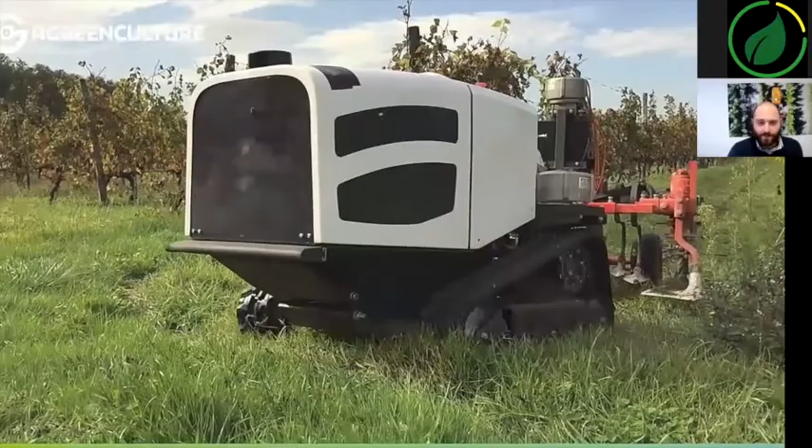My name is Jérôme Asmar, and I am Head of Business Development at Agreenculture. I will be dedicating the next 10 minutes to introduce you to our company, as well as the products we have to offer. I will be more specifically presenting CEOL, the first worldwide autonomous inter-row crawler for vine and perennial crops by Agreenculture.

Our company is a Toulouse-based agricultural robotics startup, founded in 2016 by Christophe Aubé, a farmer's son. Our structure includes today more than 40 collaborators.

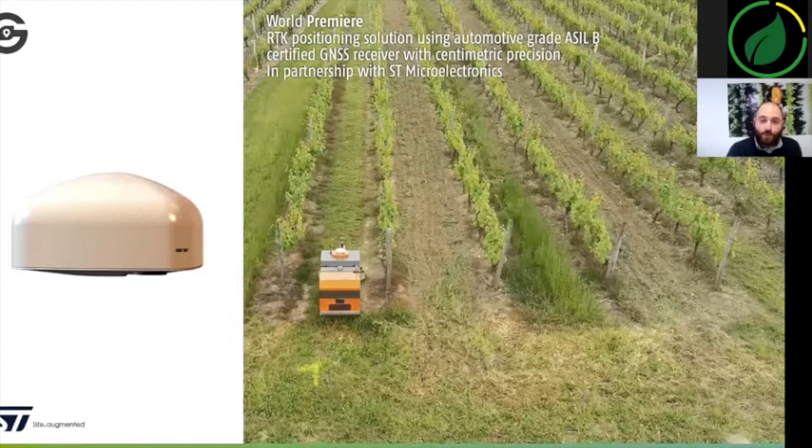Our company has 16 years worth of knowledge in R&D in GNSS RTK integrated positioning. Today, we offer on the market a world first in RTK positioning solutions, certified ASIL B, automotive grade, with centimetric accuracy.

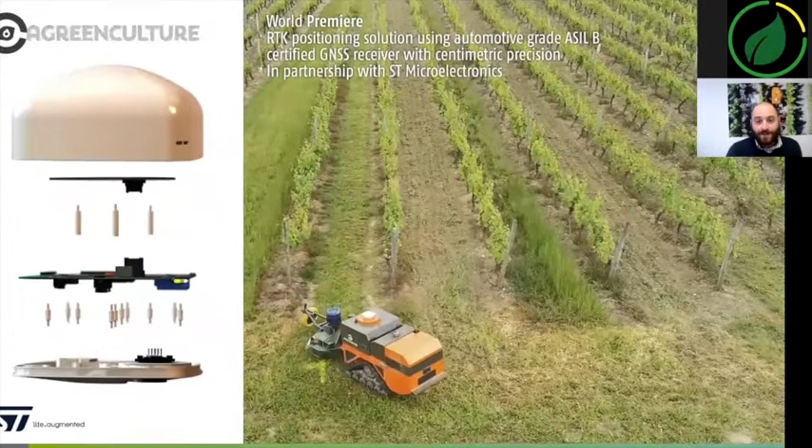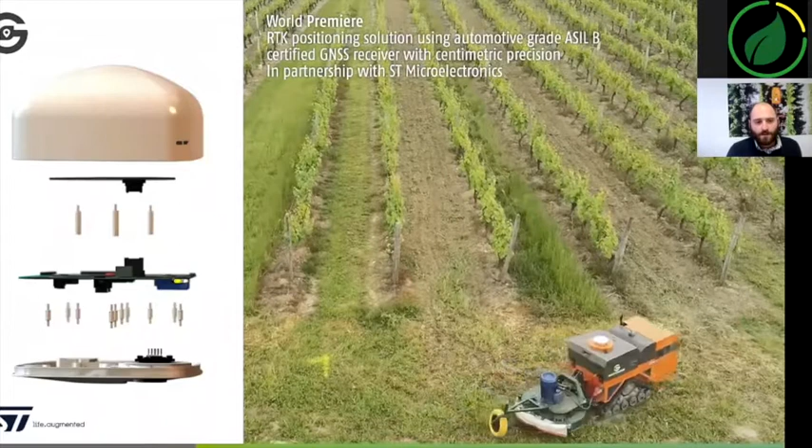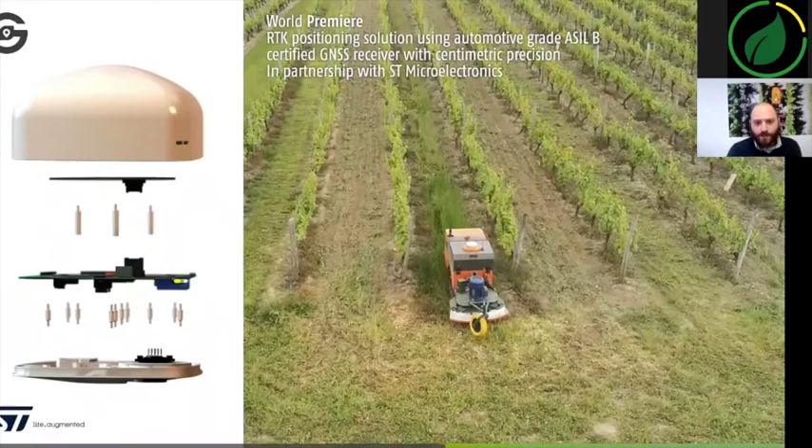In addition to positioning, Agreenculture has mastered the development of guidance laws, enabling a machine to evolve in its environment. Our flagship product, the BM Guide Box, concentrates all our knowledge and expertise. Highly connected, it is used today to position and guide our robots as well as those of our partners.

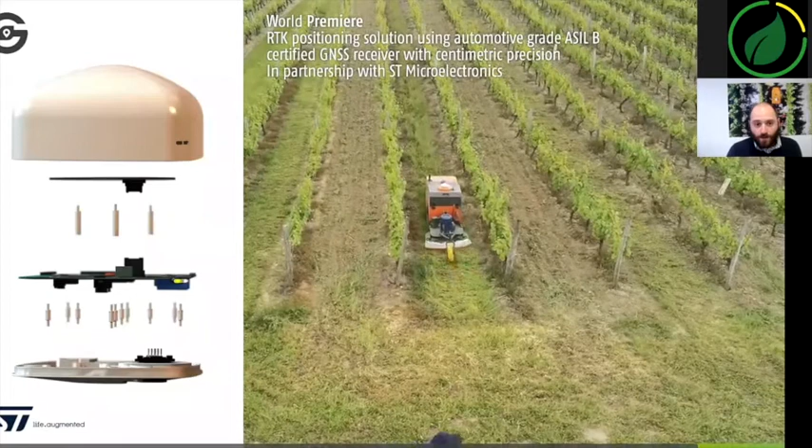Through standard communication protocols such as CAN-open, we are able to interface with any type of machine that we want to automate. Our objective is to guide in a secure and autonomous way the largest number of machines for agricultural and non-agricultural use also.

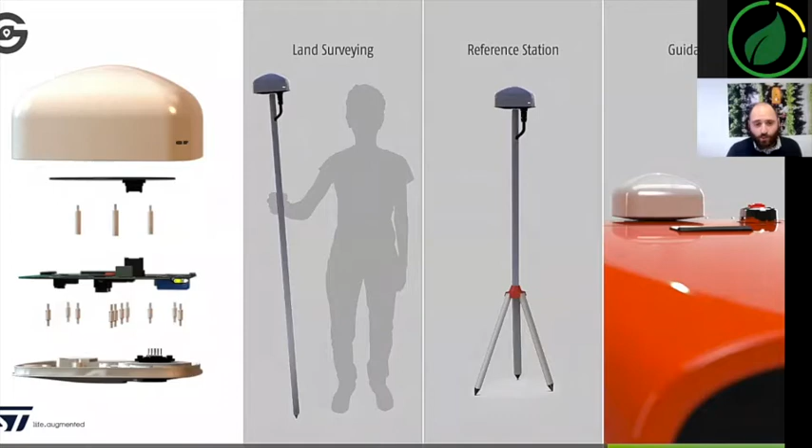It is certainly not by coincidence that Agreenculture has established itself on both the French and worldwide agricultural robotics scene. We have and continue to carry out various projects with major players in agricultural machinery equipment.

In field crops, we carried out in 2018 the CEOL challenge with the company Kuhn, which consisted of using a fleet of 3 robots to carry out an almost complete itinerary on 50 hectares of corn in northern France.

In perennial crops, especially vines, we responded with the company Pellenc to the CIVC Champagnes project call. The purpose is to develop together a robot dedicated for the Champagnes region. We are continuously looking for new partners and new challenges to innovate, making farmers' life easier.

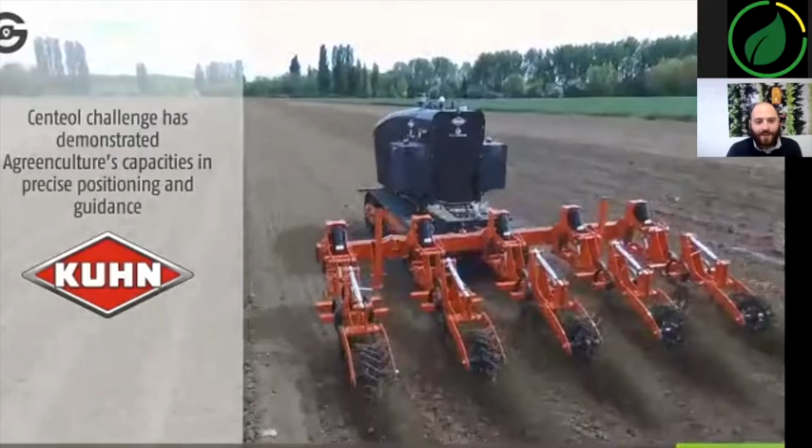Mechanization today represents 30 to 40% of the expenses on a farm. This percentage will increase in the coming years, while reducing the use of chemicals such as glyphosate. The phase-out of this chemical is already quite burdensome at both technical and financial levels. Reviewing our cultivation practices will be a necessity in the coming years.

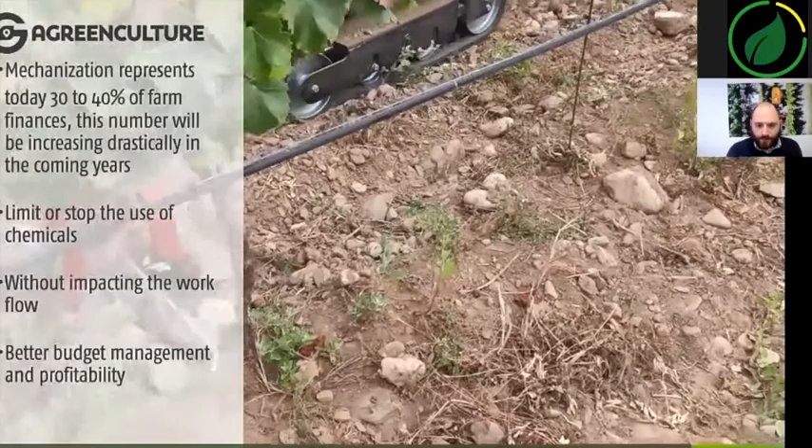According to experts, switching from chemical to mechanical weeding will divide workflow at least by 4 and increase costs by 10. Our objective is to offer you the solution that will meet your specific needs and enable you to meet increasingly restrictive specifications while maintaining your profitability.

It is in this regard that I present to you today the CEOL solution, a concept thought out with farmers for farmers. CEOL is an autonomous inter-row crawler weighing 900 kilos. It has a 48 volt electric propulsion and power equivalent to 10 kW with 95% energy efficiency.

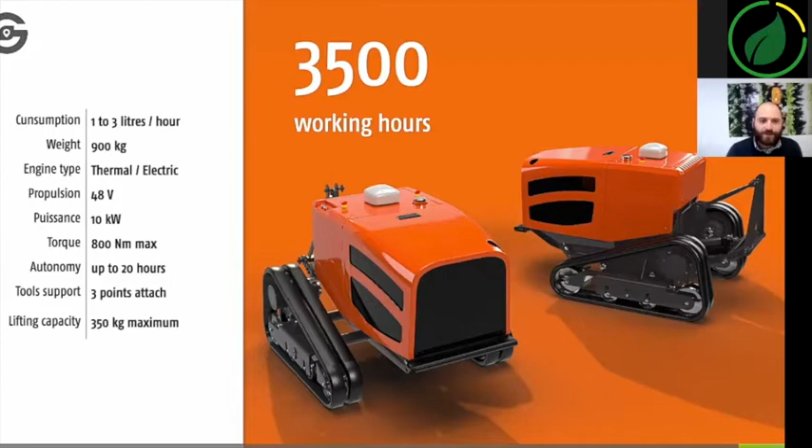Energy is provided using a 2-cylinder motor and a generator. An additional electric battery ensures movement in closed areas for transportation maneuvers, for example. A consequent engine torque, ground stability, and suitable tracks enable it to work in difficult conditions, such as slopes and mud, allowing it to work at wider windows than a conventional tractor.

CEOL can operate up to 20 hours, consuming 1 to 3 liters of diesel per hour, depending on the activity carried out. CEOL reduces your fuel consumption by 5, sometimes by 10, compared to a tractor carrying out the same activity. CEOL is the ideal compromise between a low fuel balance and work rate.

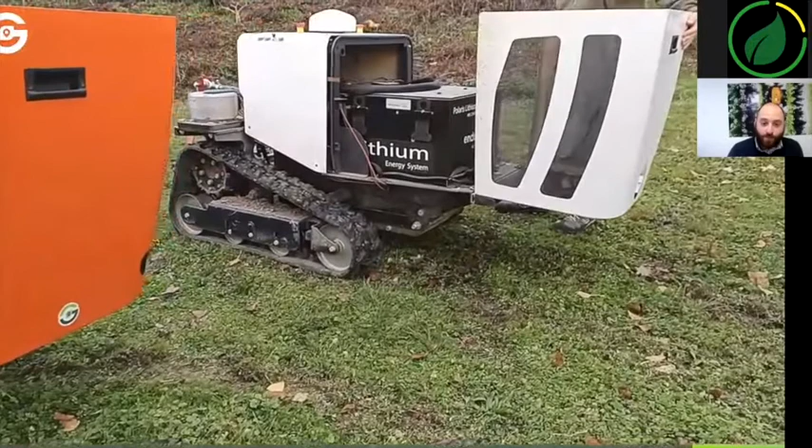With a small ground footprint and trajectory optimization, this machine will save your money without hurting your soil.

In terms of implements, we work with well-known constructors such as Boisselet and Nobili. We are looking to integrate the largest number of implements used today on a tractor. Today, our priority is row and inter-row weeding.

Tomorrow, CEOL will be carrying out all kinds of tasks in your fields. In 2021, we will be offering you a complete range of tools for row and inter-row weeding, mowing included. Starting 2022, more implements will be added to fit all your needs.

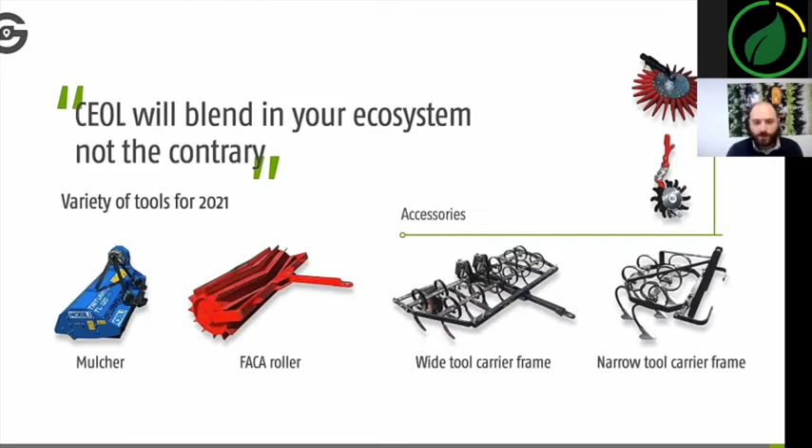CEOL, with its variable wheelbase, can work in inter-rows ranging from 1 to 3 meters. This covers almost the entire French and European vineyard sector.

For a classic row weeding activity, for example, working 12 hours non-stop at a 3 kilometers per hour speed, CEOL can cover up to 10 hectares a day. We estimate that a CEOL robot alone can carry out weeding activities for a surface of 25 hectares a year.

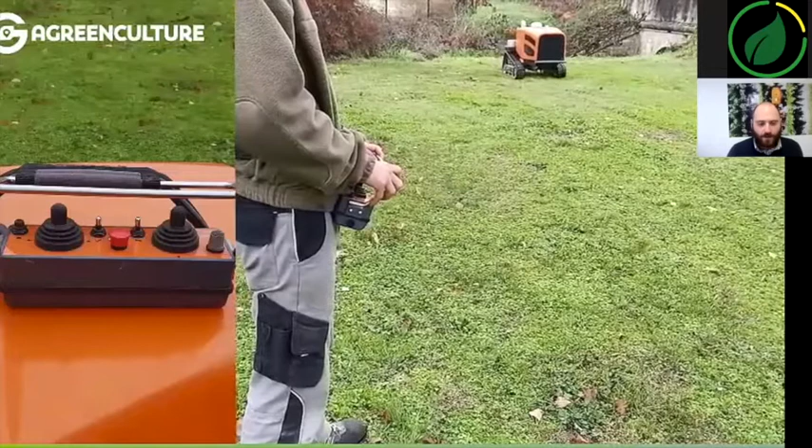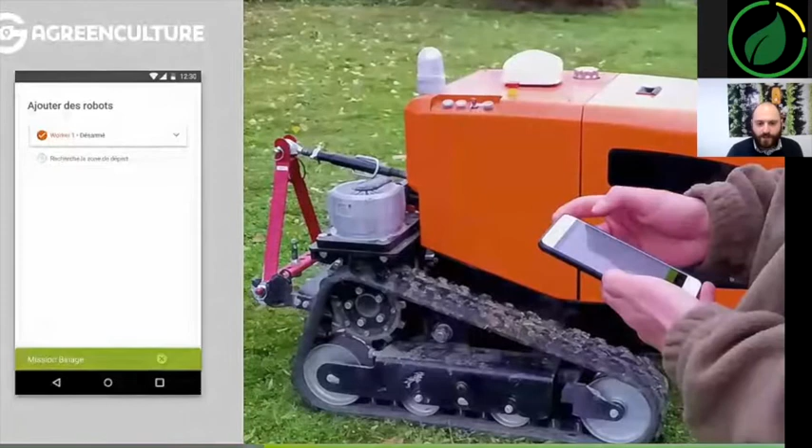In order to guarantee simple, efficient, and ergonomic operations, Agreenculture offers you two means of communication with your robot: a comfortable IP67 remote control for daily use in the field, and a mobile application for automatic mode.

This application can be downloaded directly to your phone. It will allow you to modify your robot's tasks, parameters such as lifting the tool, working speed, or even pause or stop the robot. Robotizing a vineyard is a procedure done only once in a plot's lifetime.

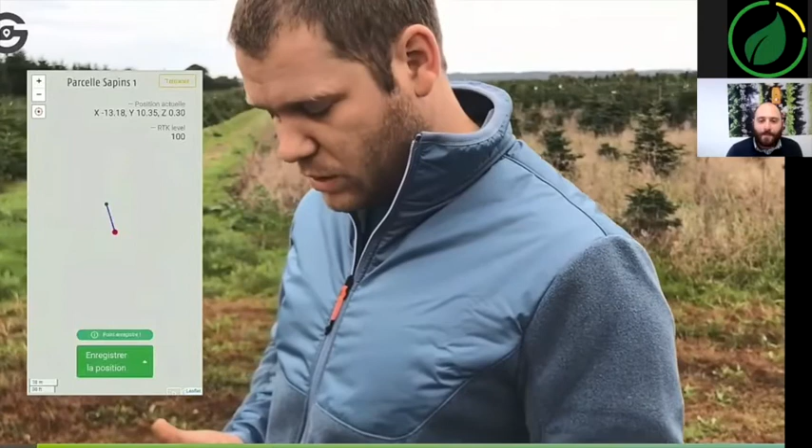After having recorded the crop rows, the user will be able to create a map of his plot. Once the map is created, the user can plan from his computer the robot's paths as well as the desired task. From his phone application, the user will be able to launch and monitor his robot, pause or even stop it remotely.

By 2022, the user will be able to visualize his robot via an online platform, plan their daily work, and even make maintenance appointments. Thanks to our robot application, manage and plan your robot tasks while enjoying a great user experience.

10 robots in pre-commercial series will be produced for the 2021 campaign. They will be running on beta test farms in various locations in France. An official commercial public launch is planned by the end of 2021.

CEOL is a simple to use, versatile, and high performance solution. Easy to transport and to maintain. It will allow you to save time, respect the soil, while guaranteeing the economic profitability of your farm.